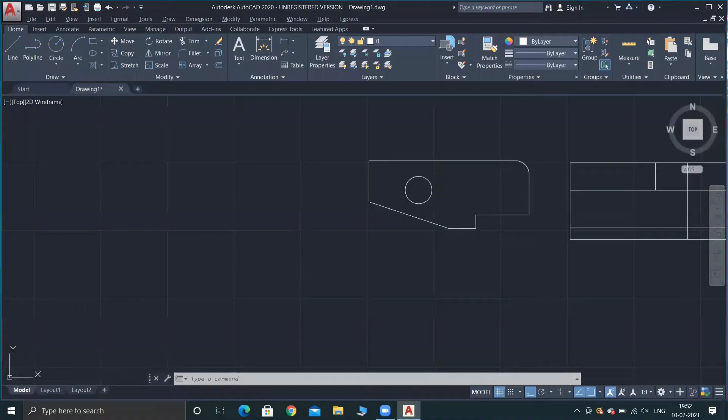First, we are discussing linear dimension. As the name indicates, it is used to measure the linear distance between 2 points. First, I am selecting an initial point, then an end point. From here, we can easily measure the linear distance between these 2 points.

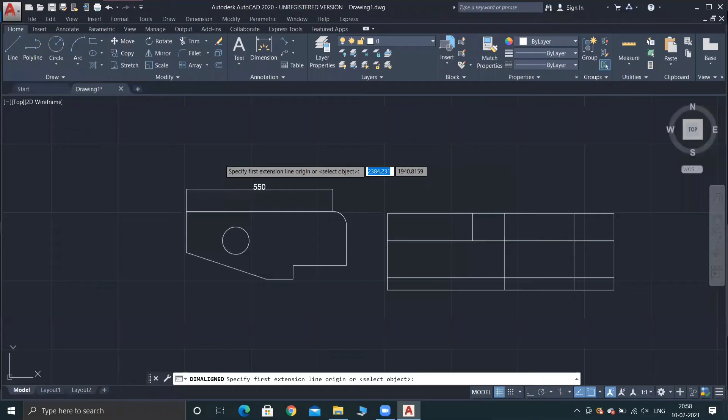Next, we have the option called align dimension. This is commonly used when we have to measure inclined dimension between 2 points. Here, I am selecting the first point and the second point. We are getting an inclined distance between these 2 points.

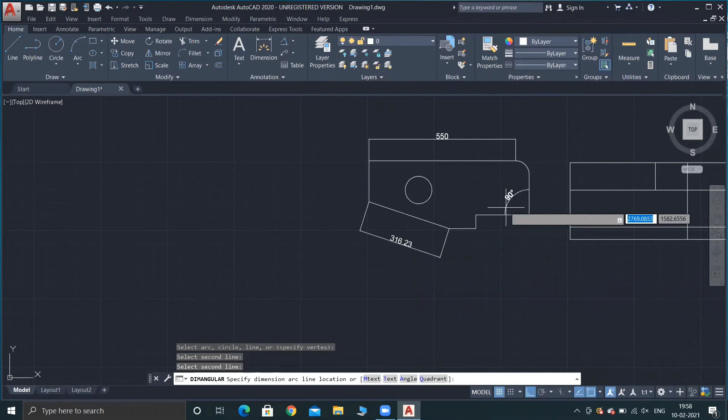Next, we have angular dimension. It is used to measure angular distance between 2 points. First, I am selecting this line, next I am selecting this one. We will get the angular distance between these two line segments.

Next, we have the option called arc length. By selecting arc length and selecting an arc, it will simply give the length of the arc.

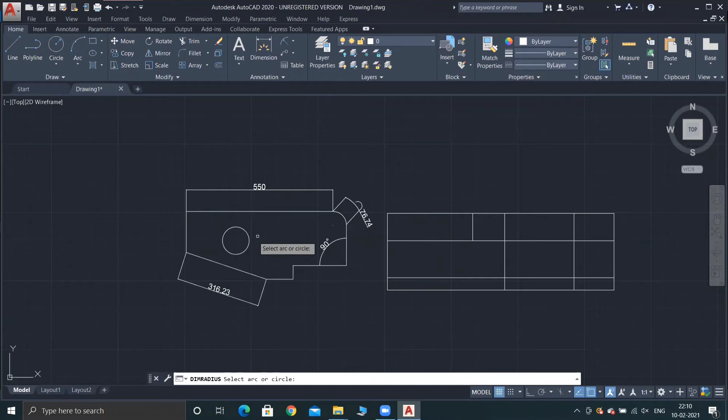Next, we have the option called radius. It will give the radius of the circle or arc. I'm selecting this circle, and it gives the radius.

Next, we have diameter. It will give the diameter of a circle or arc. I'm selecting this circle and getting the diameter.

Next, the type of dimension is ordinate. Ordinate will simply give the ordinate of a particular point. I am selecting the ordinate here. Remember, as we move up or down, it will give the x ordinate from the origin, and when we move left or right, it will give the y ordinate from the origin.

Next, we have the option called jog dimension. This is commonly used when there is less space available for a dimension to be placed. For example, I am selecting this circle and specifying a point outside this figure. Now we can see a line connecting the circle and my point. We can place it outside the figure or anywhere we want.

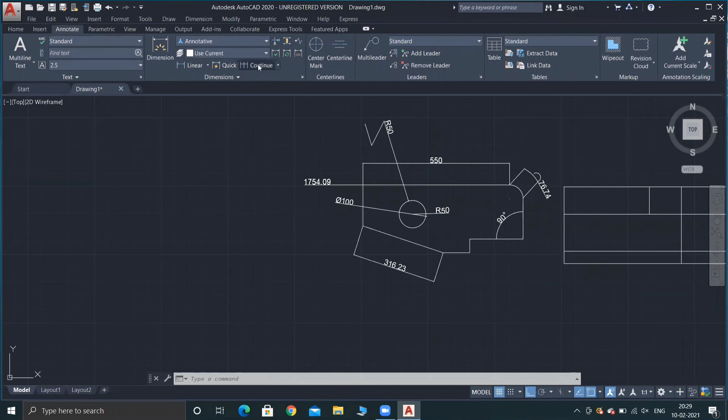Other than these, we have two more types of dimension. In the annotate tab dimension panel, we can see two more dimension types: quick dimension and continue dimension. The first option is quick dimension. As the name indicates, it will give quick dimension between selected objects.

For example, I am selecting this line, and this one, this one, and this, then press enter. Now we can place the dimension. See, it will give quick dimension between these selected objects.

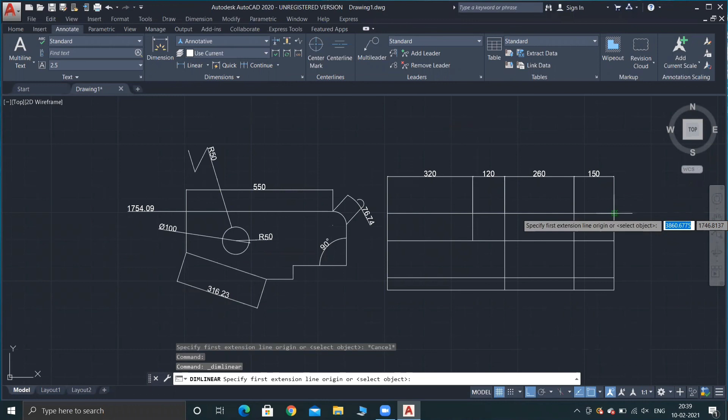Next, we have the option called continue dimension. For that, I am selecting linear dimension and measuring the distance between these 2 points. Then I am selecting continue dimension. In this, we can see it will measure the distance from the previously measured points, getting the distance between the previously measured point and the selected point.

Mainly, these are all the dimensions that we are using in AutoCAD. That's all for this section. Thank you.